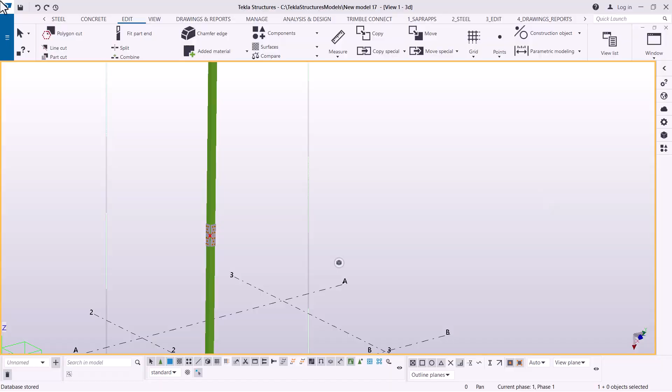Let's go to number 5, which is still a tower leg splice connection. Prior to going into depth with that, let's first place the base plate for our tower leg.

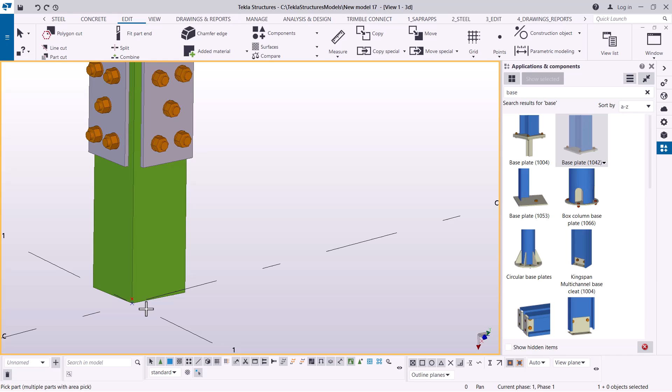I'll come to applications and components, key in base plate, and click type base plate right there. I'll pick base plate 1042, then pick the profile and locate the position where I intend to place the base plate right there. So there we have our base plate.

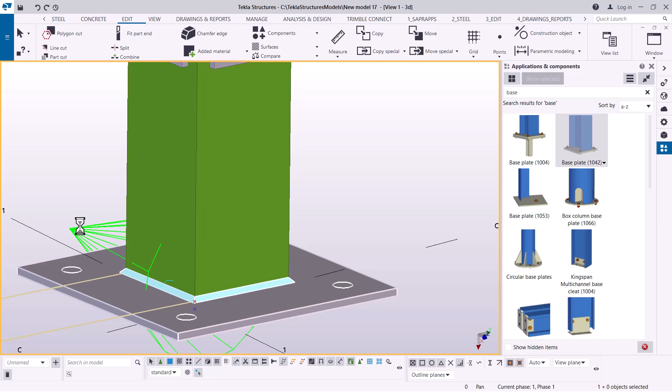I'll click interrupt to walk out of that macro. Then I'm going to double click on this green icon, the symbol of a connection. The moment you click on that symbol, it takes you to the editor dialog box, or property dialog box,

of that particular connection, the base plate editor dialog box. So we have it here. In here we'll be able to add our preferred details or customize the details. Let me just click on the Picture tab so that it displays

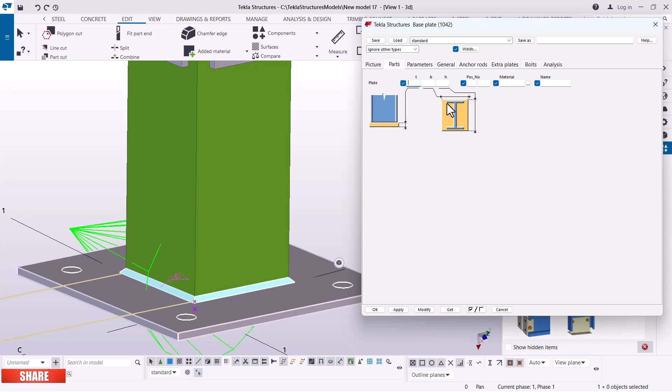the settings available and what details you can add. You can see that you can add the extensions of the plate from that end to that end. If you come to the second tab, parts, you can feed in the length and width of the base plate right there, and feed in the thickness of the plate right there.

If I come to parameters here, design is turned off, bearing is turned off, but those are not part of our training - they are not necessary at this stage.

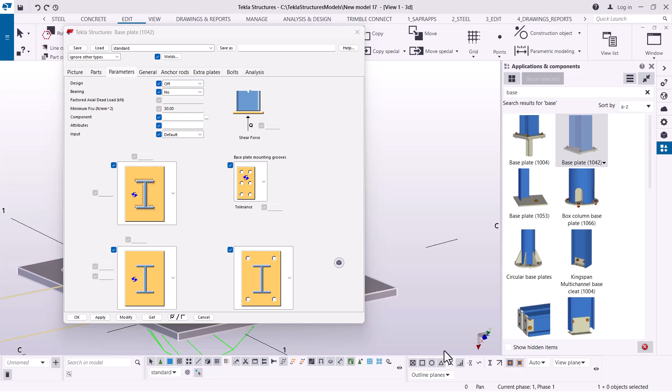Our key issue here is to place the base plate and use the right details to come up with the base plate right there. So I normally share - you can see we have anchor rods there. Anchor rods are available here, extra plates are available here, and we have bolts in place.

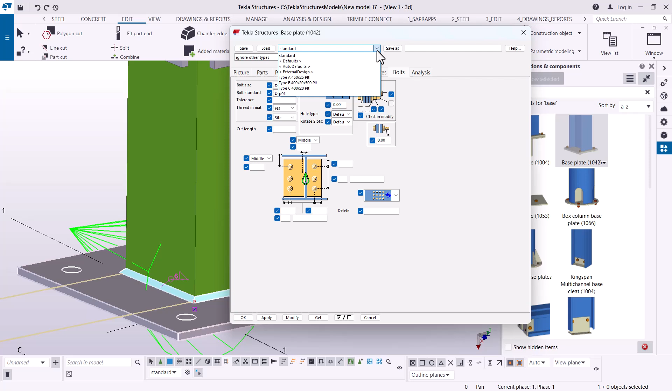So I normally save my settings in place so that I don't go back and forth trying to use some settings that might take some time to see. Let me just do that. I've seen default here, so let me just load that and see how it looks. If I click on that, I'll be able to apply and give it an OK, and you can see we have these in place.

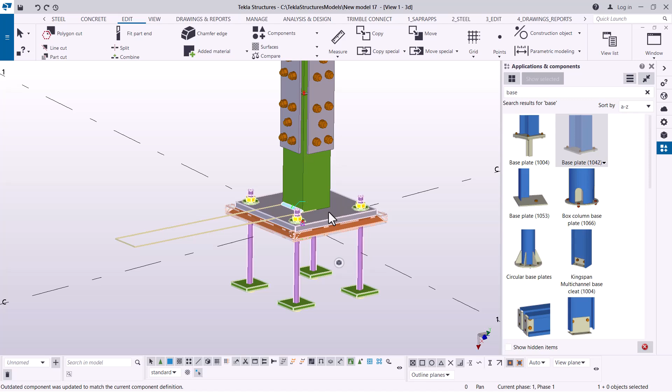We have this type of bolts in place, and if we come to view here and navigate, we can see we have the bolts in place plus the nuts in place. So this is kind of super.

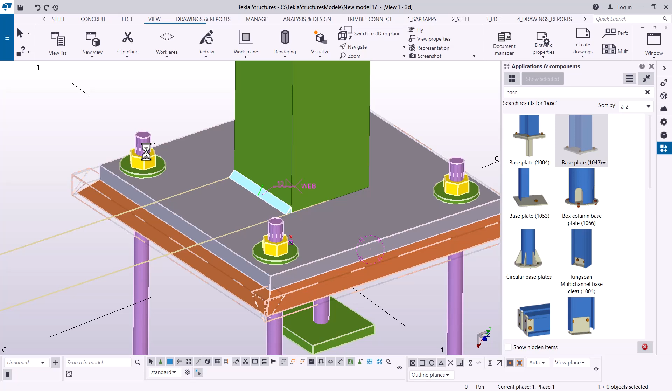If we double click on it once again, let's double click on it once again so that we set it further, or add more details to it. Let me just give some time to load all that information.

Then if I come to this dialog box here and come to bolts, or come to anchor rods here, and see what you have under anchor rods, you can see all the details available there. And if I come to bolts now, under the bolts you can see we have

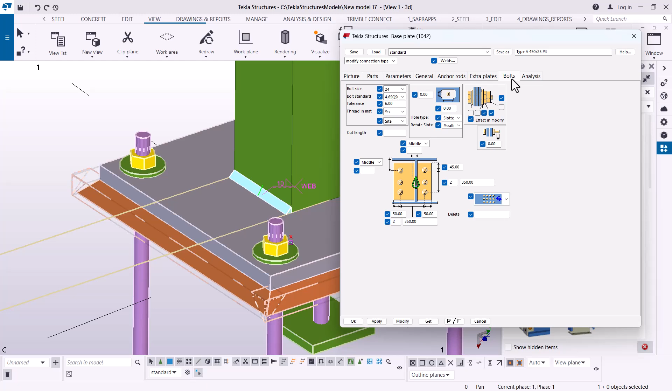4 bolts, and I need 1 bolt here and I need 1 bolt here. What do we do? Well, now what I'm going to do here, I'm going to add 3. So if I add 3, I'll see which side I'm having the 3rd bolt. So you can see it's out of order.

So what I'm going to do once again, I need to get this 350 divided by 2, and then divide that by 3. Let me come to 350 and divide 350 by 2, so that we'll have 175.

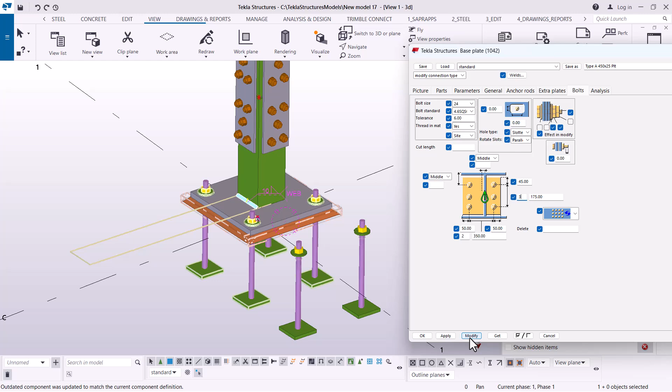So if you come to 175 here and add 3, let me try that. We have the 3 in place, so we have 3 in place.

So once we've done that, we want to add another one here. We come here, 175, right there, and make it 3. So if we key in 3 there and click modify, we'll see which one, where it ends.

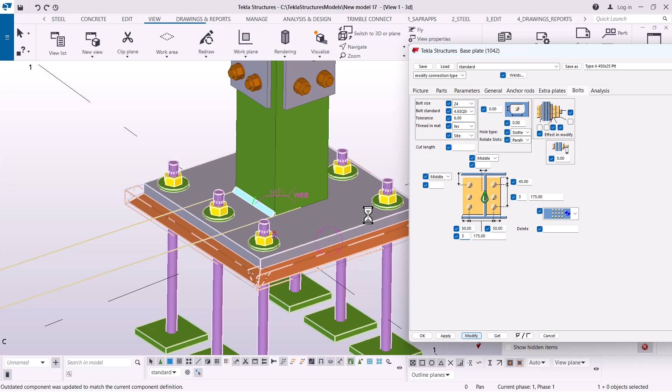So it ends there, and if I come to navigate and try to rotate that, you can see another bolt right inside. We don't want to see that bolt, we don't want to see this bolt here.

So what we are going to do is very simple - I'm going to delete it. So how do we delete it? We'll count the bolts. The bolts will start 1, 2, 3 all the way to 9.

So we'll try here where one starts. Just key one here and click modify and see which bolt gets deleted - that has been deleted.

So we'll assume the count starts from 1, 2, 3, 4, 5. So we'll go ahead and remove that, key in 5 and click modify, and you'll see the middle one disappears. Once it's done, we'll always go ahead and click modify, click apply, and give it an OK.

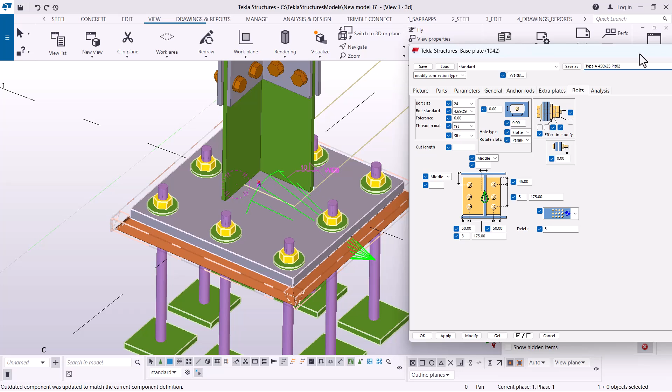So this one we can save as 02. Once we've saved that as 02, we can go ahead and click save as.

Once you've saved that, we'll go ahead and click modify, give it an OK, click apply and OK. Now once you save that, that's our own setting we've just created. So we have that in place. The next thing is we'll apply this to all the legs.

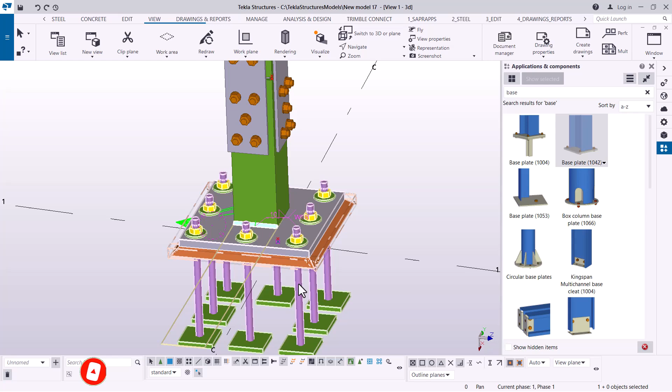Now that's aside. We want to start splicing, creating the L splice connection here. As I had told you, just key in 175 right there. Once you've done so, we are going to start placement of the L-shaped splicing right there.

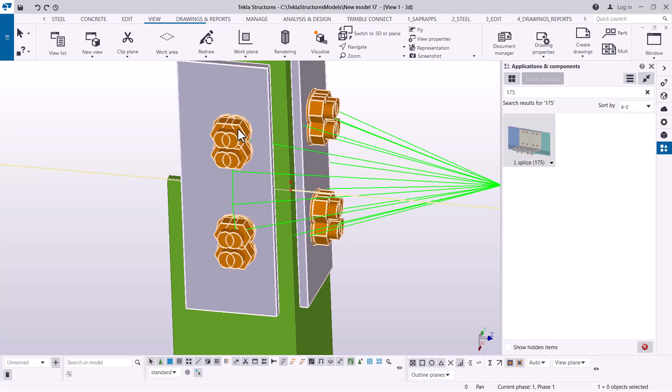Let me double click on it so we see how we can modify this further. Let me give you some time to process that information, and I'll come here and use my previous settings. Let me load that, because you don't want to spend so much time.

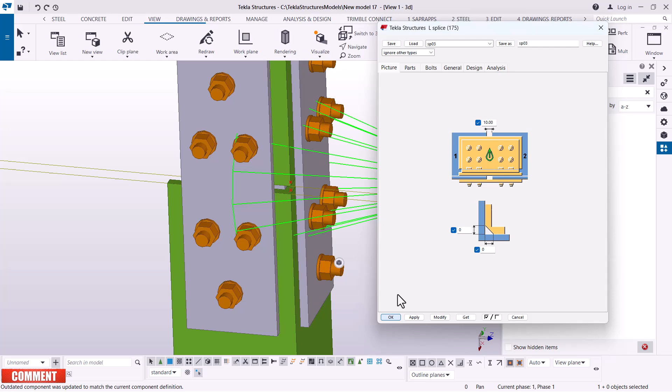If I click modify, let me see where we are. If I click OK, I'll be able to navigate and turn that around, and we have our splice connection in place. You can see the splice connection.

Don't worry about the settings I had used. Let me double click on it so the settings will be displayed. If you apply the same details it will be okay. You can see the entries, you can see under parts. I just left it at default, so I didn't enter any profile for the L. For the L, I just checked that and left it on default.

If I come to bolts, you can see all the details I had used. On the general tab, I just left it on default. On the design tab, also default. The key part is the picture here, where you see the preview of this L splice. This one too you can probably leave on default.

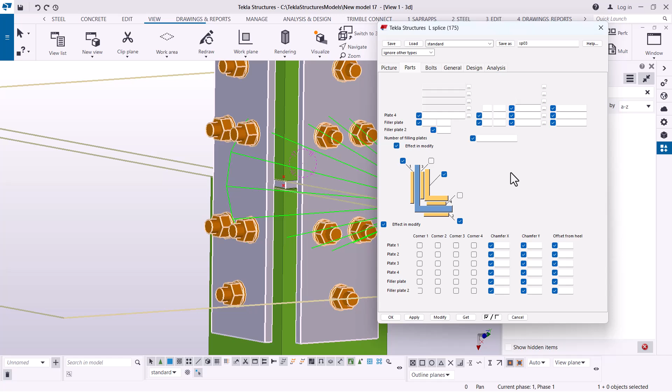In the bolt section, you can key in the details on how you want your splice to stretch. This defines the size, how lengthy the splicing plate should be. Then there you are, I'll click OK. I think you've seen the details I had used.

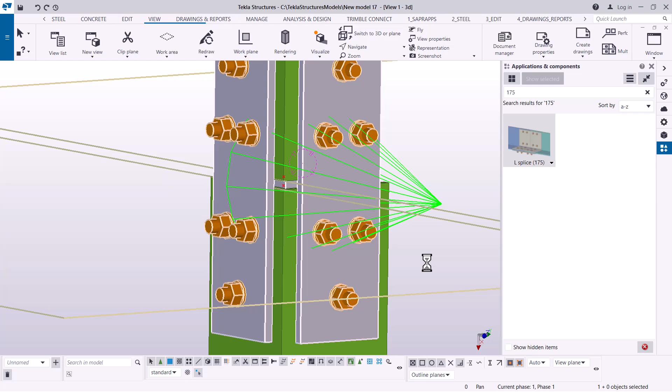So I've spliced that, now going to the next part. I'll select on that, and select on this and that, and the splice has been created. If we see a green connection, it means the connection is perfect. I go to the next one, and connection has been created.

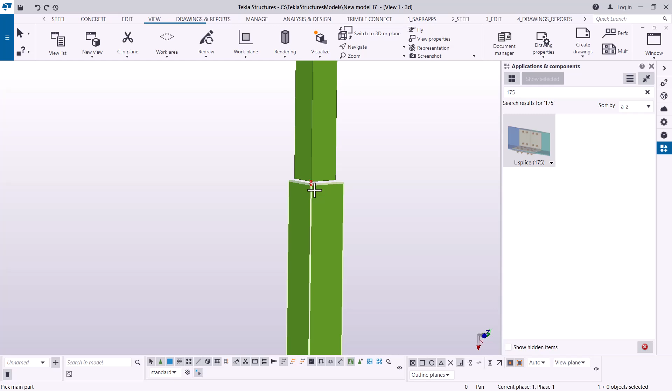Then I'll go to this one, and some details tend to clash. So I'm going to double click here — the yellow means it's not perfect, but averagely okay. I'll try changing this to a different one and click modify. So that one turns even worse.

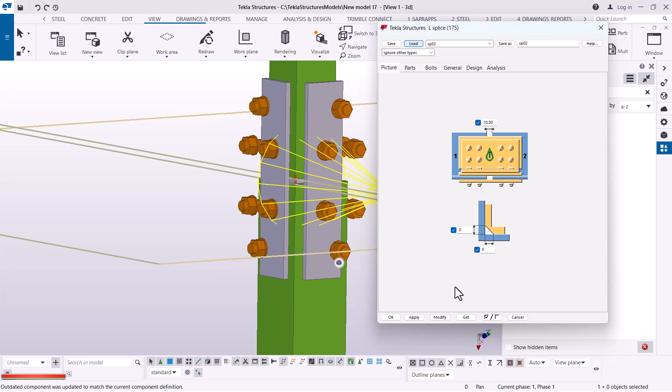Let me come back to my previous one, click OK, and click load. Let me load that, and come to sp03 and click OK. This is somehow okay, but our editing and modifications can begin from this part.

So let's now get into details on how we can modify this. Once I've double clicked on that, I'll come straight to bolts here. Under the bolts, what you want to do is either change the bolt pattern — we can change it on this section, and on this section, and that section. So we can change the bolt pattern here.

If I come there, maybe I can pick a different one. I click on that, let me try that. And that is not sitting well with everything. Let me try that — so that's kind of okay, but let's try once again.

Once we've picked on that and changed all the measurements, let me pick this. There, it was somewhere here. I think it is this one, it is this one. If you click modify, I think it's slightly pulling into what we need.

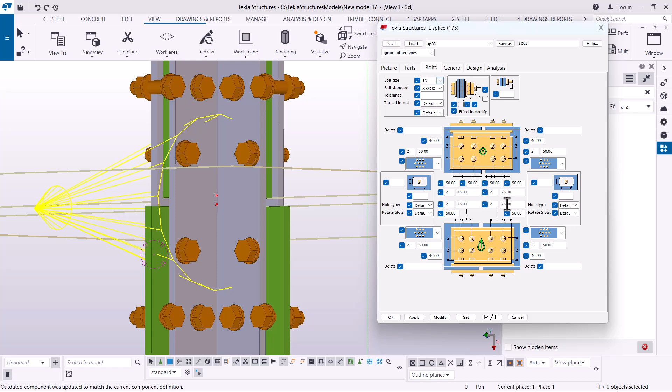What I'm going to do next is properly play with the measurement and size of the bolt. The size of the bolt will not change, as I can see everything here. Now I'll come here and try to change this to 60. Change that to 60, and see how this adapts to the changes we are going to make.

Let me go ahead and click modify. If I click modify, it gives some details that are not really adding value. Let me come here and try maybe change that to 1 — just leave it to 2 right there and click OK.

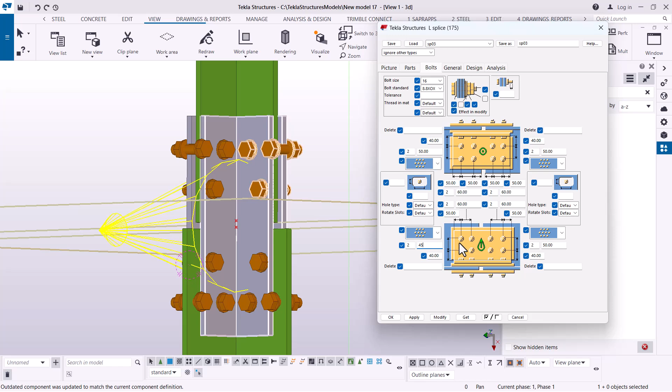Perfect. Let me come back and try change this to 45. Change this to 40. Change this one to 40 also. Let me go to the other side and change that to 40. This one can also change to 40. This one also changing to 40. Let me go ahead and click modify.

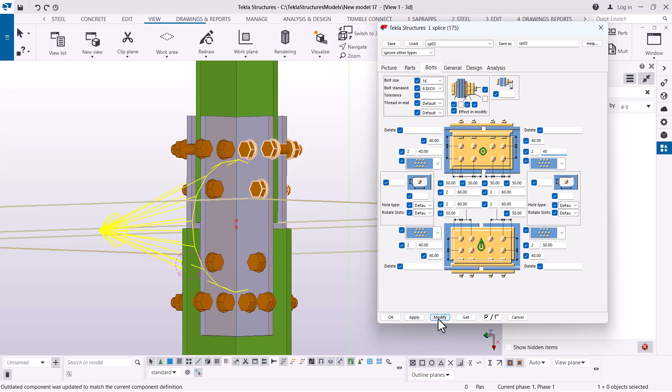So let's pick on this for the next topic, but on this next part under the same topic. The reason is because I don't want to take so much time, and let's modify that on the next presentation. Let's meet then.